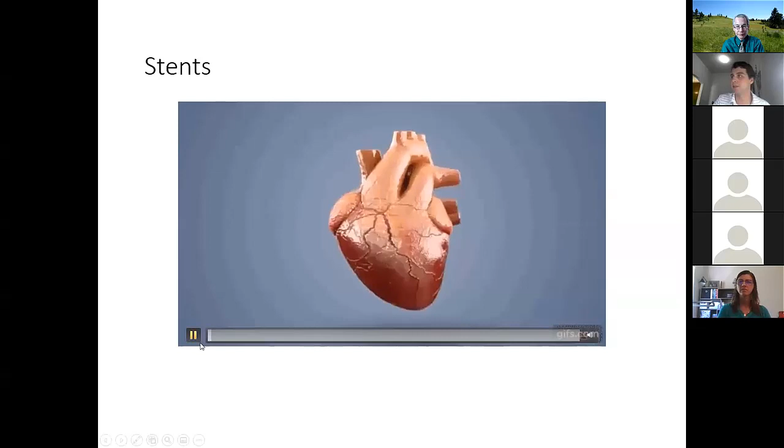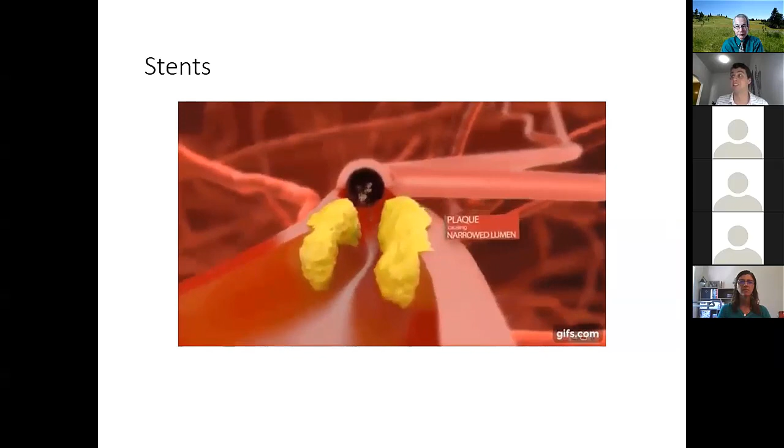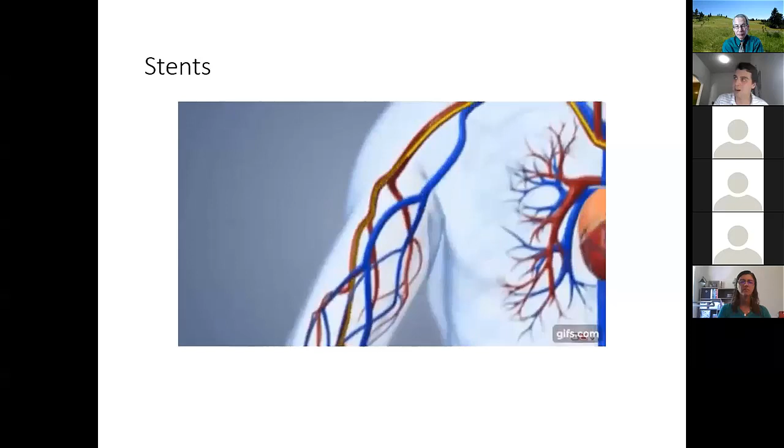But this is showing that within an artery, you can have a blockage, such as if you have a buildup of cholesterol, or in this video, it says there's plaque. It's narrowing the artery, the amount of blood that can go through. And so that's bad because blood needs to get through, right? So the procedure to help with that blockage is you go starting from the arm all the way through the blood, all the way into wherever the blockage is.

And you put this really small tube called a catheter. And you load this really small metal device called a stent. And it's used to push open the walls to keep it from collapsing further. So here, this was just a random video, but most of the time this is done with a metal stent. It's usually made out of a material called nitinol. That's kind of like a springy material. So think of like a slinky, but in a circle.

So you compress it all together and then you put it in the right spot and then you allow it to kind of go out. And so in this video, they showed a balloon pushing it open, but a lot of times you want it to naturally spring on its own towards the wall. So you don't need a balloon. By its properties, it springs out. It wants to go back to its normal position.

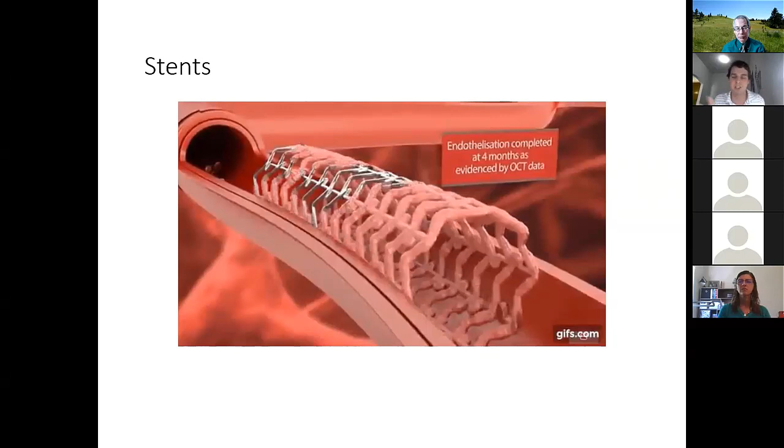So what are some problems with stents, right? Why did I care about this? So first of all, stents are very expensive to manufacture. If you can imagine, you're going to put a metal piece in your body in a vein, and it's also very small, maybe a diameter of 3 millimeters. I have a ruler here. It's like this. From the end of the ruler to here, it's pretty small.

They're very expensive, and also you have to make sure that they're polished and really nice so they do not rupture any walls in an artery or something like that. So that's one big thing.

The second thing is that it's kind of a one-size-fits-all mentality. So kind of like small, medium, and large shirts, right? There'll be a small, medium, and large stent. And the only thing that might change is also there's like a 10 centimeter long and then a 20 centimeter long or whatever it may be. So different lengths. And so that's a problem because everyone's arteries are not the same. There's so many different uses for a stent. So it doesn't really make sense to use this sort of one-size-fits-all methodology.

So the third problem that I've identified is there's some long-term problems. So if you have a metal stent in your artery, maybe 10 years later, if that thing is still there and it gets dislodged or something and moves down an artery, that can cause a lot of problems. And then the final thing is that in pediatric cases, there's growth in the patient, right? So if you have a child that needs a stent, and that child's going to grow and their arteries are going to grow, that's going to also cause some major problems.

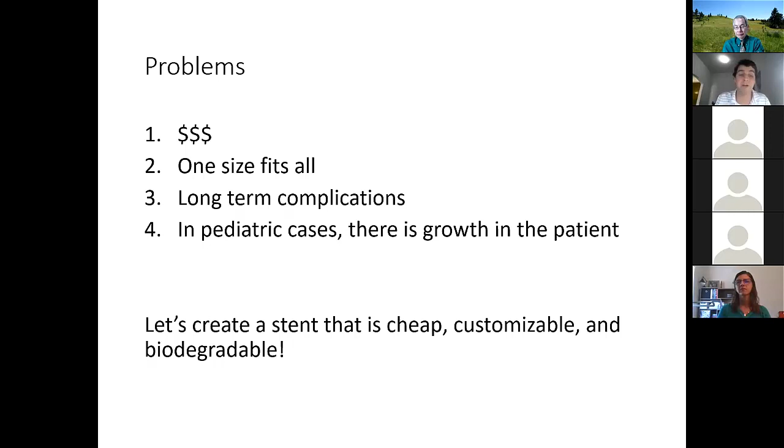So then the motivation came, let's create a stent that's cheap, customizable, and biodegradable. So cheap fixes problem number 1, customizable fixes number 2, and biodegradable is going to fix number 3. And so the idea is, and it's been shown, that you don't need a stent to hold open your artery for 10 years. After about, I think it's around 6 months, it's been shown that the blood vessel will naturally kind of take that new shape on. And so the idea is, what if we can just put one there for 6 months and then it'll biodegrade away? It'll just go away.

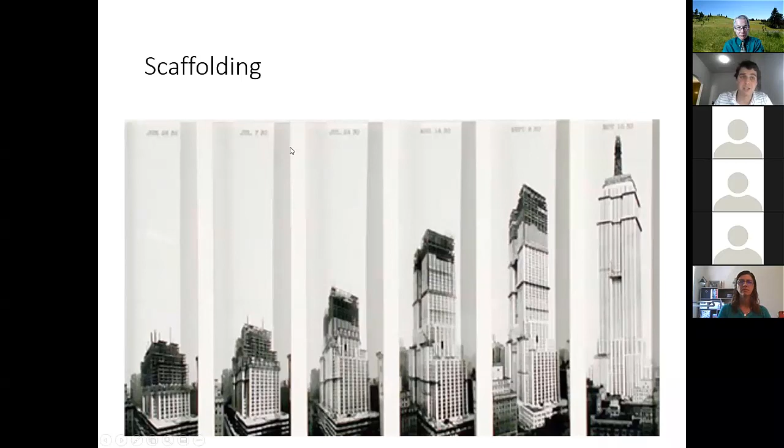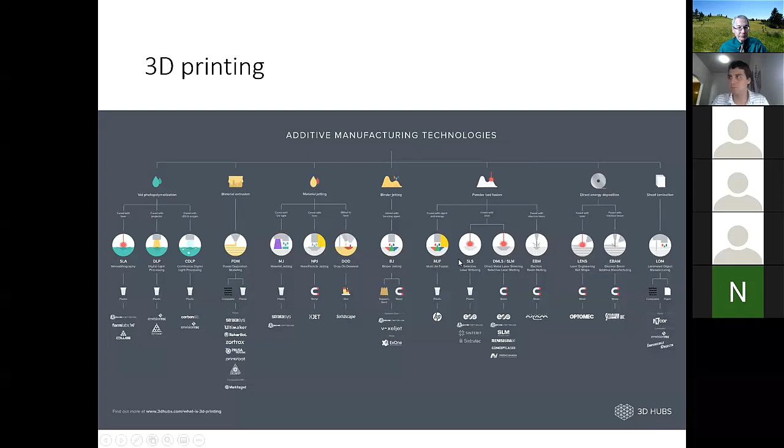So this is fused deposition modeling. It's probably the technique you guys are familiar with if you've heard of 3D printing. And so the idea is basically that of a hot glue gun, but with plastic and at a much finer precision. So you have this bulk of plastic that's hard, and then you heat it up, just like in a hot glue gun, and then it becomes liquidy, comes out of this nozzle. You can create a certain arrangement, and then quickly it cools. And then you can put your build platform down a little bit, and then you can do that again. And you can build layer by layer and build a cool 3D object.

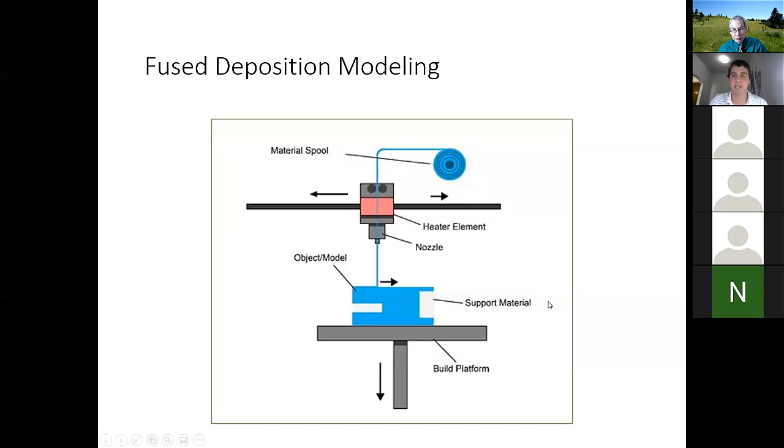But that's not the type of 3D printing I used. I used something called stereolithography. And this is a technique that works by completely different mechanisms. So it's nothing like the hot glue. Instead, you have this resin, which is basically just like a liquid bath, a specific liquid.

And what happens is you shine a specific type of laser, a UV laser, or actually other types of lasers too, at the bath. And the bath, basically, there's a chemical reaction that I'll show on the next slide that occurs, and that liquid becomes a solid.

And so what you do is, as shown here, you do this first layer, then you have to go up, the laser will go do its thing, then you go down into the bath, then you go to recoat it, then you go up, you laser again over and over until you can get this sort of 3D shape. And I want you guys to notice here that in this method, you're going down into the bath, okay? Because that's gonna change pretty soon.

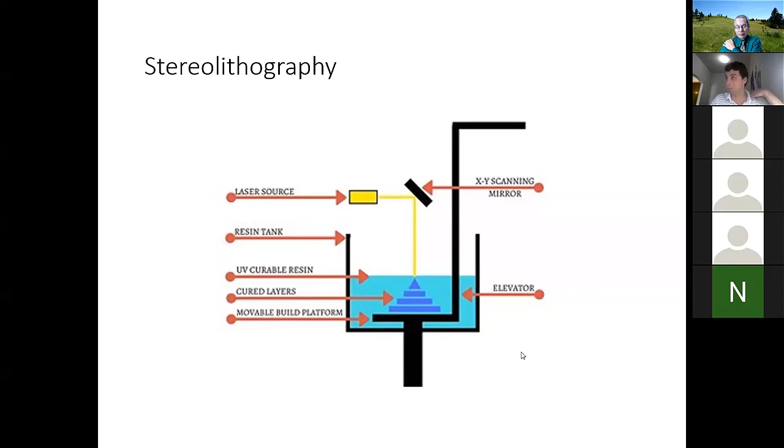And the reaction that occurs is called photopolymerization. So you have a liquid with multiple different components, but in its most simplified form, you have some sort of monomer, one chemical formula. And then you also have this photoinitiator, that's another chemical that's in the bath. And when you shine a UV light onto this bath, the UV light carries energy.

And I actually remember getting politely scolded in Mr. Sogo's class about not covering myself while I was using a UV light because it's not good for you if you look at it or if it touches your skin.

And the UV light basically activates the photoinitiator. And then there's these chemicals that are like, I want to react. And then all of these individual pieces get linked together through covalent chains. And so you get this solid, right? They're all linked together, so you can't really move that. Whereas this one, if you pushed right here, this would maybe move over here, right? So it's a liquid to a solid based off of the UV light.

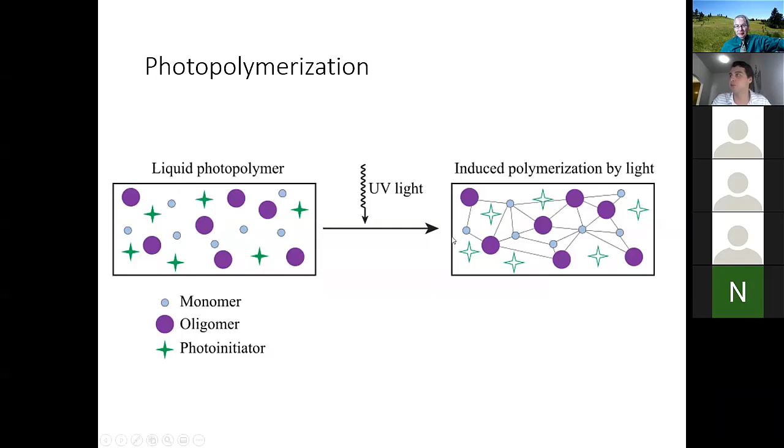And so there was this breakthrough called continuous liquid interface production a few years ago that was the basis for what my research specifically was on. So I'm going to show you a video from this company because they make it look really, really cool. And then I'll explain what's going on after. So this is 7 times speed. So this is going on faster than they're showing, but it's still really cool.

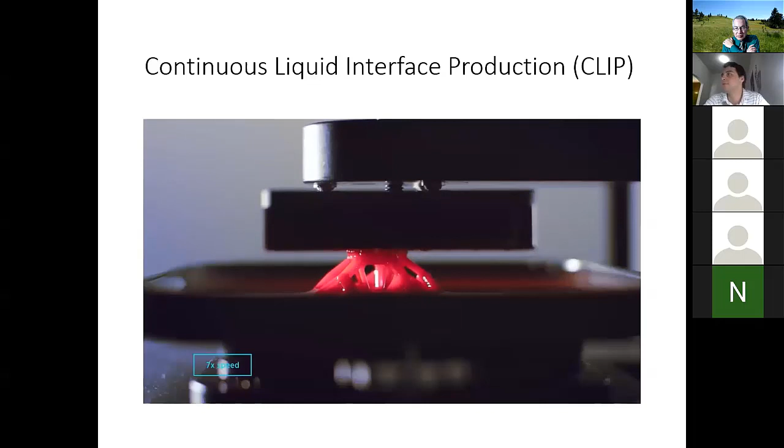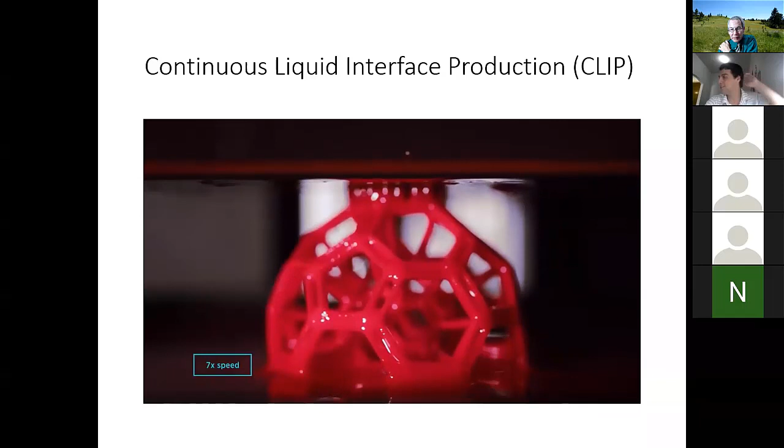Whoa. I'll skip forward a little bit. Basically, there's this thin bath here. Now there's a big 3D printed part here that does not fit in the bath. So it's like, what? How'd they do that, right?

It looks like magic. So the way that this works, it's based off of the previous technique I talked about, where there's the resin that's being solidified. In the previous slide, I said that it was moving down into the bath, but you can see here that this isn't moving down, this is moving up. It's pulling the solid out of the liquid, which makes it look like 10 times as cool as well. And so the way that can be done, which is a new and novel idea, is that you allow a tiny bit of oxygen to pass through.

So you have this UV light source that's projected. Sorry, I went too fast. So you have a UV light source. That's the UV light. You shine it at this DMD. A DMD is the same as a projector in your classroom. It's thousands of tiny mirrors that are either shining towards this direction or just reflecting the light somewhere you don't care about.

And so you can put in a program and say, I want these specific mirrors to be shining. And what that does is it creates, from just a broad UV light, a specific pattern that you want. And so that pattern of UV light is shown into the bath. And you have this oxygen permeable window at the very bottom. So what this oxygen actually does is it prevents the photopolymerization reaction from happening, the reaction I was talking about earlier.

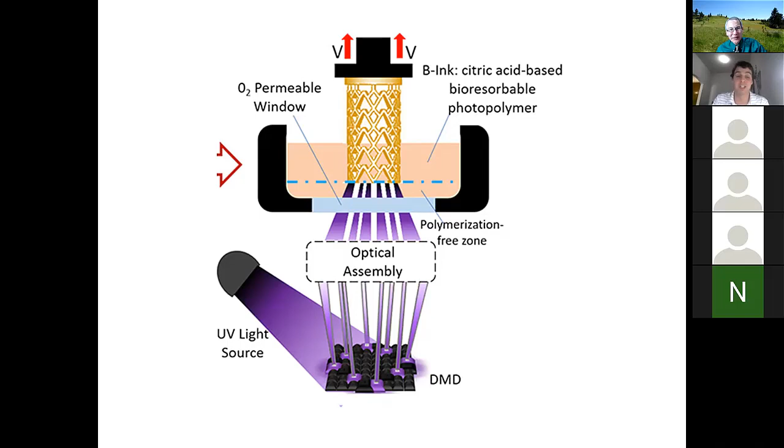And so how do we design something, right? I have this cool thing here, like what is that? Well, we take a software called CAD, which is a computer modeling software, somewhat similar to those that are used for Pixar movies, I would like to imagine, or animated films. They use a similar software, and we can create a certain shape that we want. So this is the shape that we want.

This would be very difficult to build either through old methods or through using the fused deposition modeling types of 3D printers, just because of some of the geometries on it. And what we do is we basically take an electronic deli slicer and we slice this into 4,000 individual slices, and then we get 4,000 cross-sectional slices of this thing. So if you played starting from here all the way to here through the system, you would get the full shape by the end of it. And so we can stack all the layers on top of each other and get our final shape.

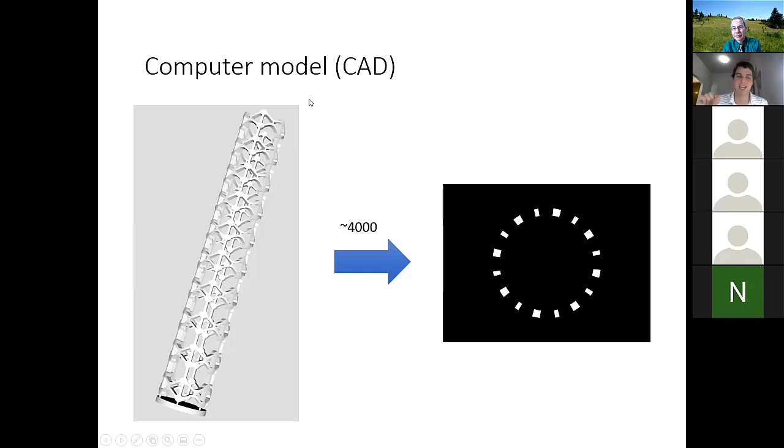And one thing that I didn't mention before, but I'll mention now, is that with this CLIP-based system, where you're moving continuously up as opposed to down, up, down, up, this part that we printed, which is about the size of maybe half your pinky, but not as wide, would take 11 hours to print a really good version of on the old down-up printer. But it took us around 11 minutes to do that on our new printer.

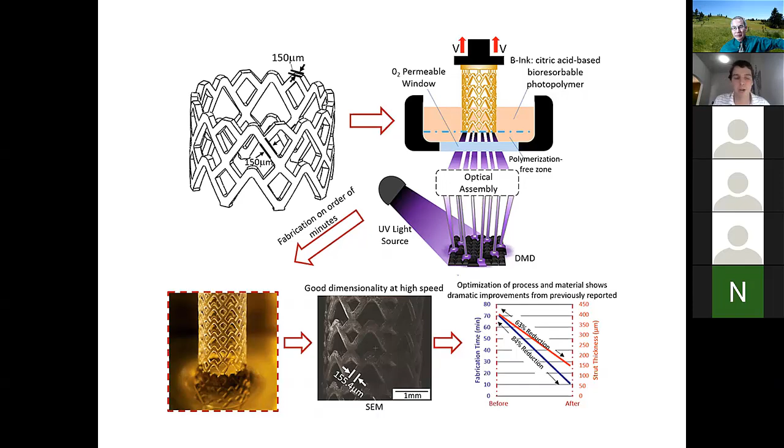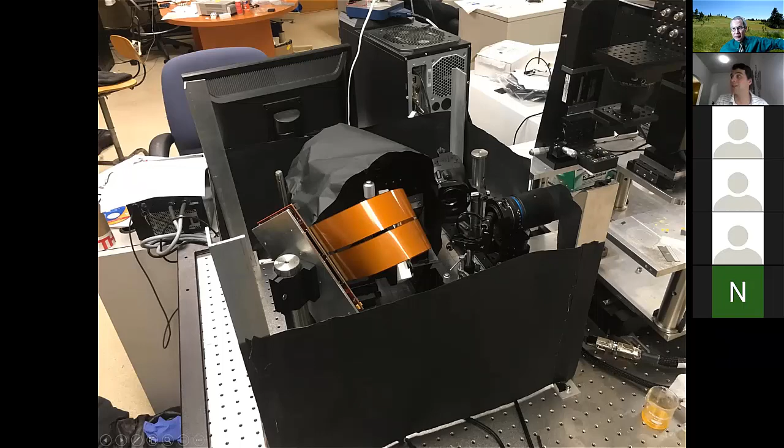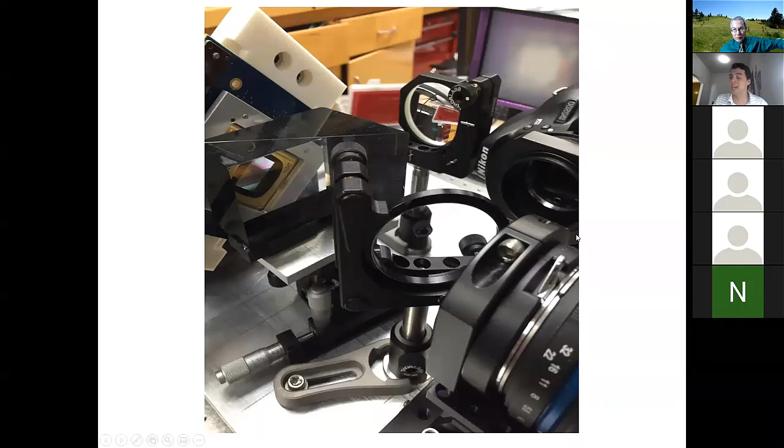And I'll show it from another angle, so this is looking from the other side, at these cool optical components. So you would take the UV light, you would shine it, it would bounce off of the DMD chip all the way through here, underneath, bounce up underneath the bath, and then it would cure in the bath. And we also had this camera here so we could basically see what was going on.

And then I have a video of what our printer looked like. So again, this is sped up. I think people still think it's cool, but I think it's a lot less cool than the CLIP one, just because we're printing something that's so small, it's hard to see what's going on for most of the process until the last couple seconds. So there's already solid plastic forming under the surface of the liquid. Yep, we can't see it right now until a couple seconds from now, but right now, stuff is happening, you're gonna have to believe me, besides the stage just moving up.

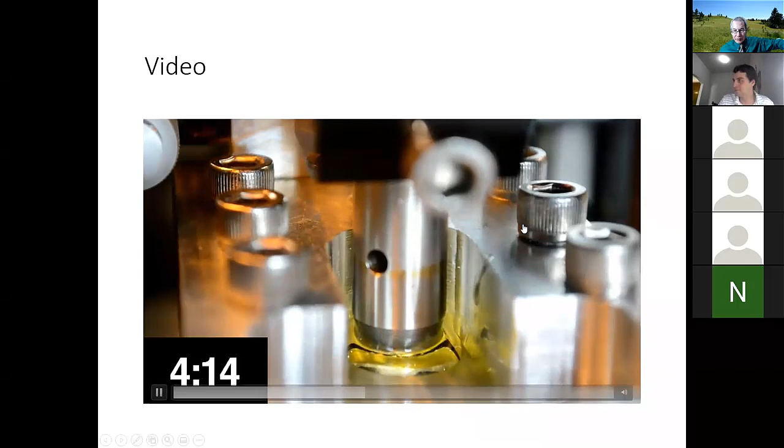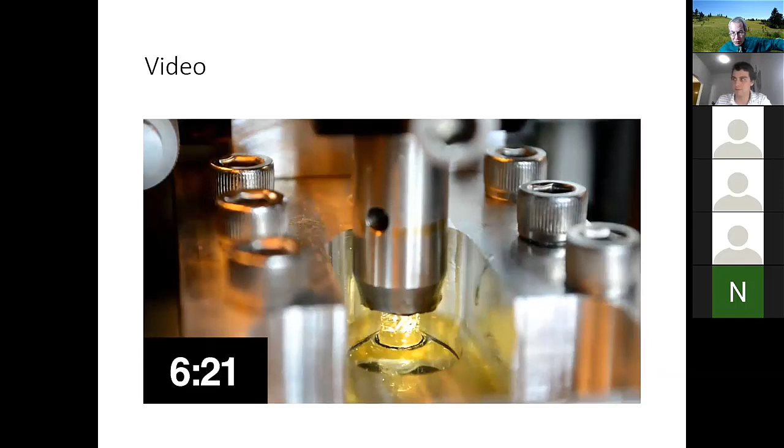And again, this is very, very small. This is about the size of the end of my pinky. It's probably the size of the part that we're coming up with. Okay, so now we can see the solid being pulled out, but the actual reaction's happening maybe a centimeter below the surface? Yeah, it's much lower. It's underneath the bath. Neat.

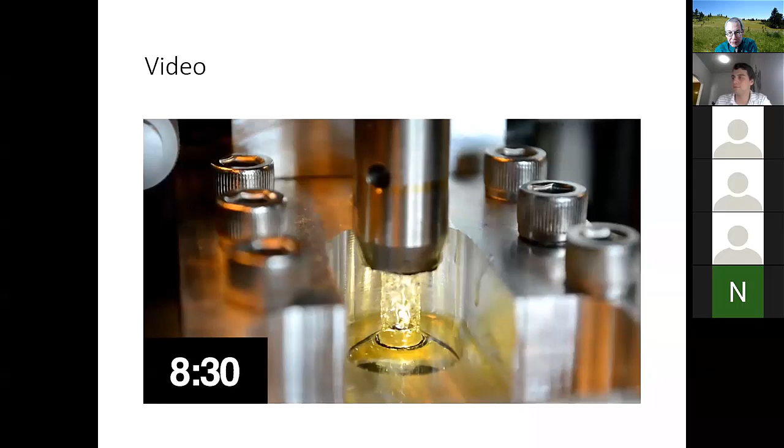There we go. So there's our part. It still had some liquid resin, so if you dab it off with a little Kimwipe, you can see what this final part looks like. And this took, I think it said 9:38. And so again, it went from like 11 hours to around 10 minutes. You're pretty happy about that when it happens.

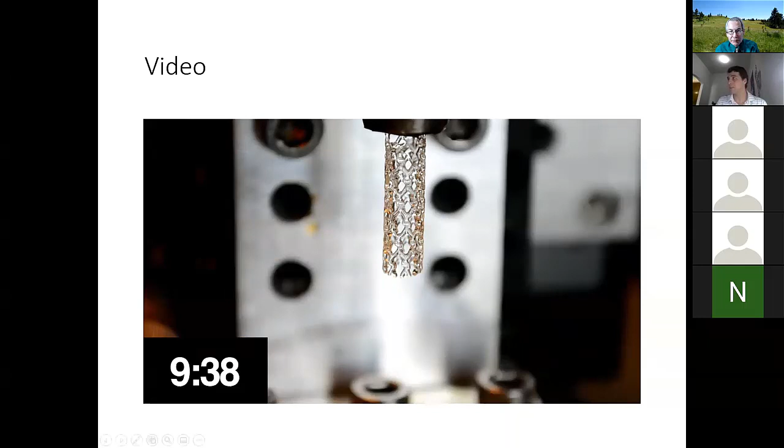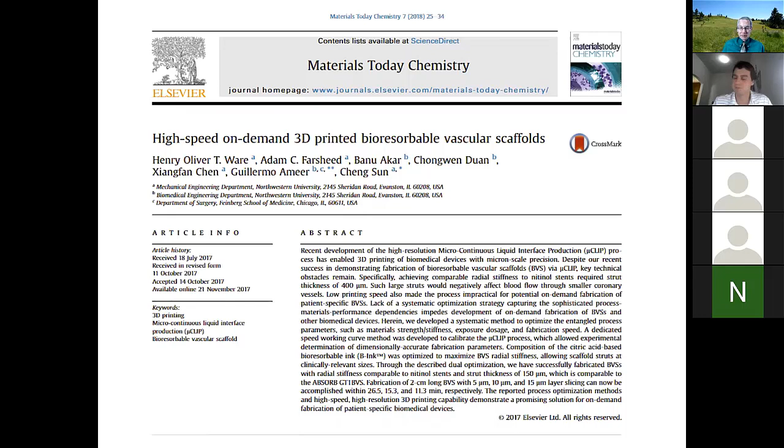One quick thing before I pause for questions: our stent was also self-expanding through temperature. The idea, before I show you the video, is what if you could compress the stent to a small diameter and freeze it so it's really cold, and then it holds its shape. Then you put that stent through the arteries into the blockage. The body's natural warmth warms it, which makes it self-expand, and then the stent does its job. Here I froze it into that U shape.

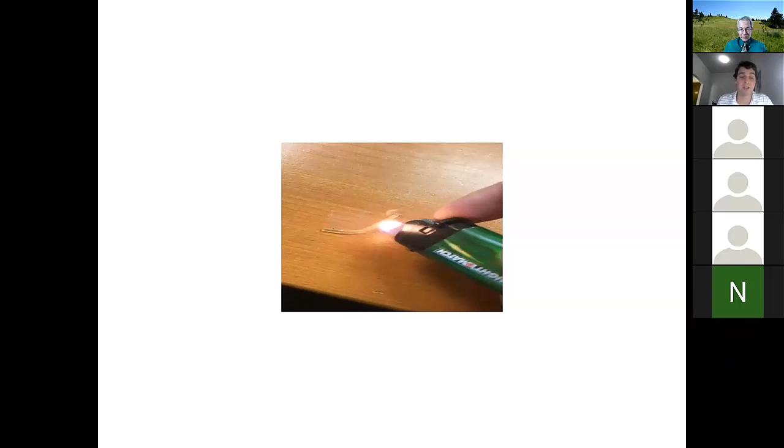If I'm just trying to drastically show the reaction happening, when I heat it up it pretty quickly straightens out into a straight line. This was at the later end, after we published everything, just trying to show other cool ideas that we might be able to pursue. This is about 25 seconds in, and after a minute you can see it straightens out completely, which was the original shape of the object.

So with that, I'll pause for questions again, and next I'm going to be talking about my current research.

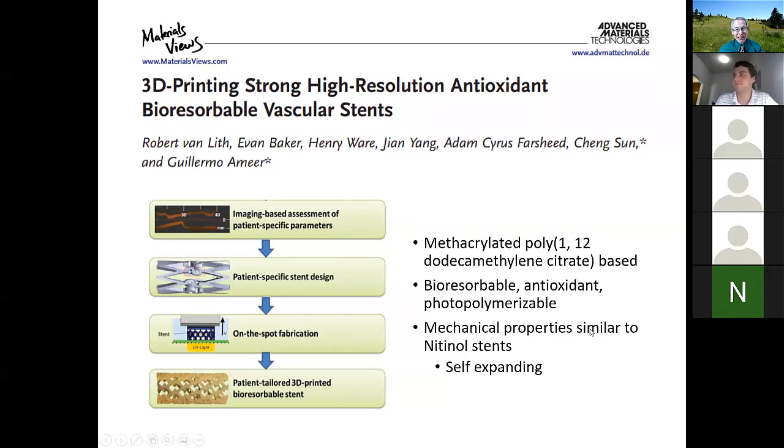Okay, I was wondering about that because it needs to be really precise, and I'm imagining if you just shone light, then you get plastic forming where you didn't want it. So you need a certain intensity for it to work, and all that's part of the chemical mix. Yep. I guess you didn't play with that, but clearly other people in the lab made modifications. So we were given the MPDC, but we actually messed around with the different concentrations, like how much solvent, how much MPDC, to come up with our final concentrations. Okay, very good.

All right, I think we'll let you go forward and talk about this next area of research. Okay, so should I plan to stop in 4 minutes? Should I go super fast? Take your time, do it well. And if students need to leave, they'll drop out on their own. But we've got a good crowd, and we hope they'll stay to the end. Awesome. Won't be too much longer.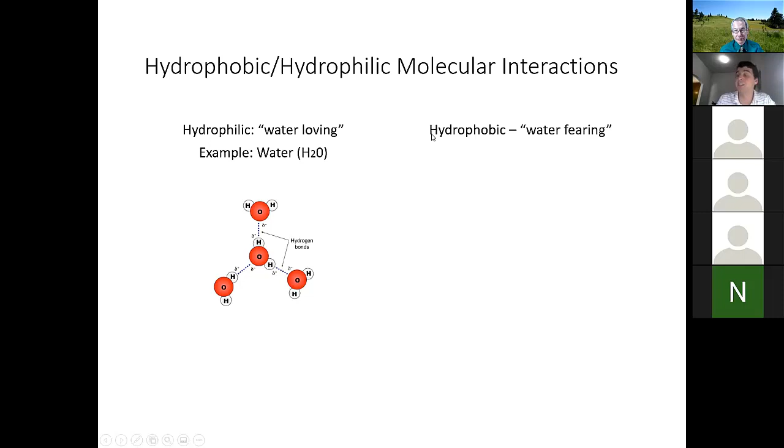One thing I should mention is I'm now in a chemistry lab, which is a full 180 of what I thought I was going to be doing, but that's how it goes.

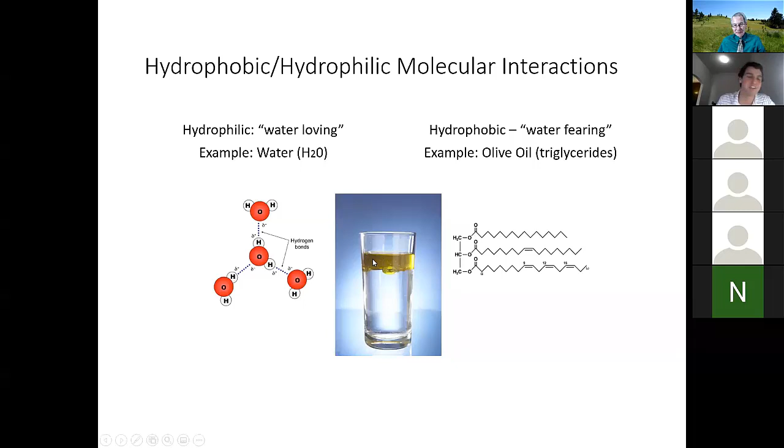In reality, the water just really loves itself, and this stuff doesn't really matter. And so this is called the hydrophobic effect.

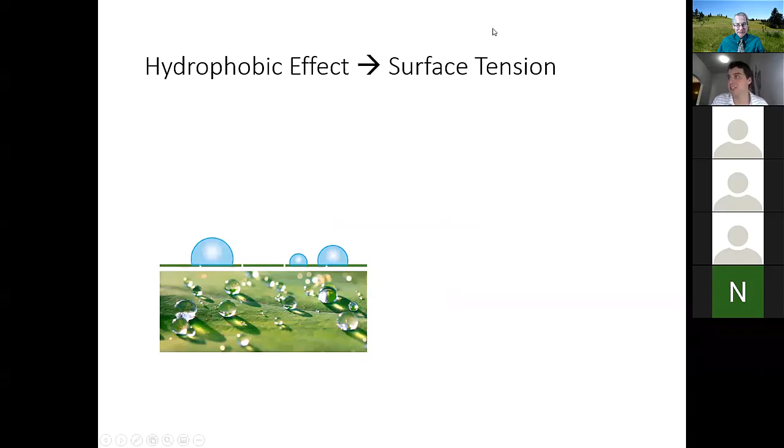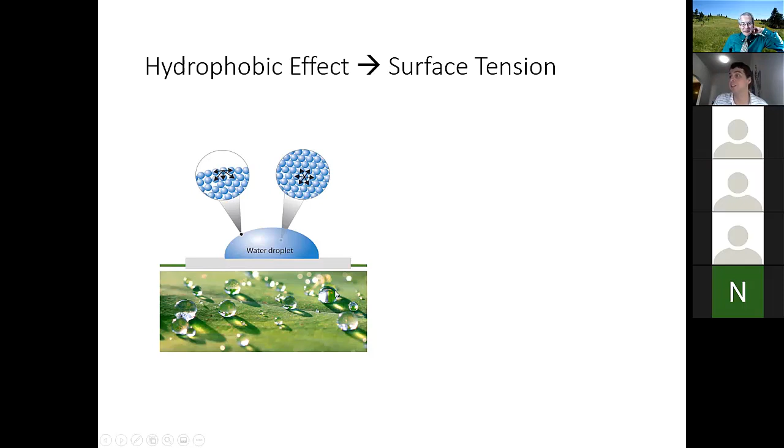I have a video here of me explaining it, but we're not going to go over that.

So next up, I'm going to quickly talk to you guys about amino acids. You might have heard this term before, but basically these are the building blocks of proteins. So all proteins are made up of combinations of tens, hundreds, or maybe even thousands of these amino acids in certain sequences that make some protein have a certain function, which is pretty cool and mind-boggling if you think about it. I don't really believe it, but I guess it's true.

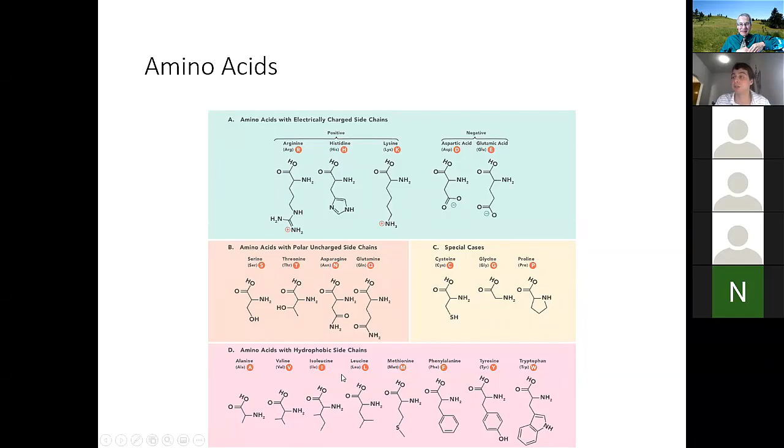Well, what if, in our lab, we try to create a multi-domain peptide hydrogel? What if we could just use those amino acids as the building block and build cool, smart structures? In our case, I'm just going to quickly go over this one molecule that we've been using. It's called K2SL6K2. The K stands for lysine.

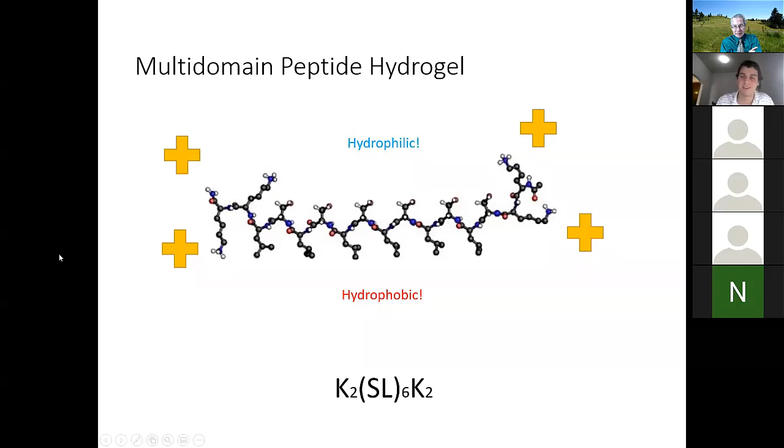And so you get this aggregation of hydrophilic on this side, hydrophobic on this side, and positive charge on either side. So you might say, okay cool, now what? Well, what's really cool is if we put that in a solution of salt water — and I'll explain why salt water is necessary — you get this hydrophobic packing. One of them orients itself in the direction I just showed, and if you add another K2SL6, it would try to flip over, wanting the hydrophobic sides to be close to each other and the hydrophilic sides separate. So it's kind of similar to the oil and water.

The hydrophobic part wants to be next to the hydrophobic part. So these would stack together, and you could get this really long chain formed. And so if you add this to some sort of salt solution, you get the formation of a hydrogel, which is basically like a jello, but for purposes of medical research primarily, along with other stuff, I guess.

And the reason it has to be a salt solution is because, as I mentioned earlier, you have all these positive charges on the side. And as you know, if you try to take two positive charges and put them close to each other, like this guy and this guy, they don't like that. So the only way that they'll go ahead and form this is if you have negative charges in the solution, and they will go and mask, kind of cover all of these positive charges with negative charges. And then the molecule's like, okay, well, since that's covered, I'll go ahead and form a fiber.

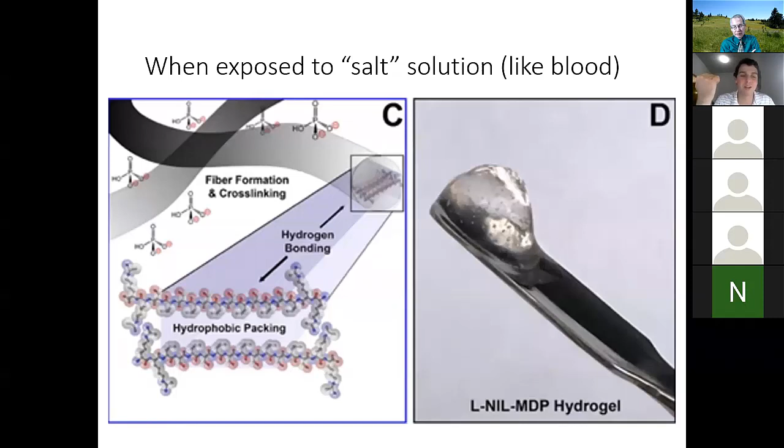And what's really cool is the idea is you can take something that's in a non-salt solution and it's in a liquid form. And then once you put it in a salt solution, it could become a solid. So if you injected this into the environment within the body, it would go from a liquid in the needle to a solid as soon as it hits the wound site.

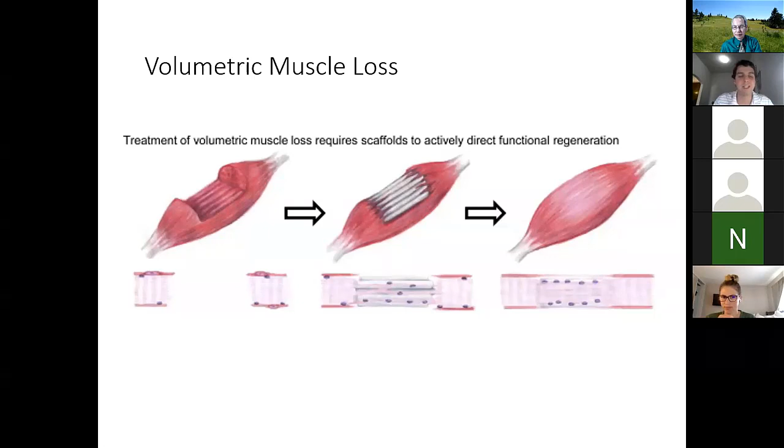And so the idea is, if you take this large chunk out, what if we could put our hydrogel in to basically help the muscle regenerate itself to go from injured back to normal? So that's kind of what my project will be doing. Maybe I'll be doing 3D printing. That's something that I'm looking into now. But again, I'm at a very early stage, so I can't say as much about what I'm going to be doing in the next few years.

So finally, my advice for you is get involved in research as an undergraduate and find a lab that looks interesting and just go ahead and email the professor.

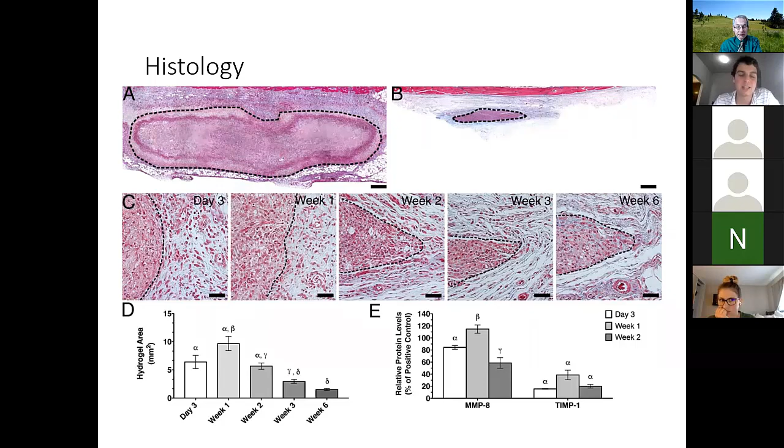new sequence potentially? One thing that I'm currently really interested in is, instead of having this nanofibrous hydrogel that's kind of going in all directions, I want to try to make it so it's all aligned. So if you can have an aligned scaffold, you can put that in a muscle and the cells will say, hey, that's aligned, I know that I got to go that direction. And so to strategically align it so that you can help regenerate certain injuries. Okay, and that's maybe where your 3D printing can do that, huh? Right. Make it all line up. I think 3D printing is in my future again with this work. I'm just not sure how long until I get there. Yeah, okay, that's wonderful.